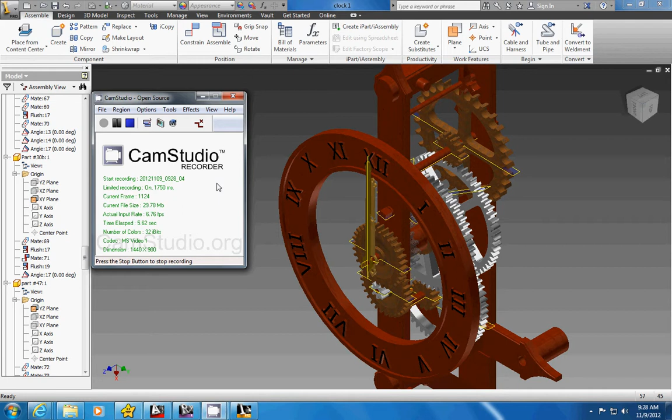For the second part of this clock animation, I'm going to show you how to make the gears work together. So you can see that I've left on all of my different gears planes that I was dealing with. And you can go ahead and see, like I explained before, that this gear and this sleeve all work together.

I'm going to go ahead and rotate a little bit so I can go through these things that work together once again. This gear and this gear all work together. I take that back. This gear and this sleeve. This gear and this sleeve.

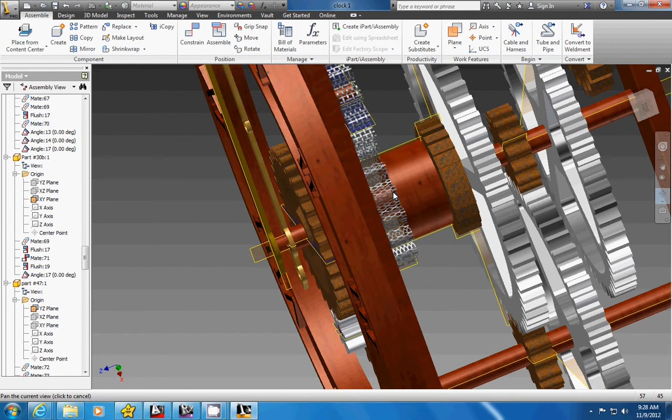Then this gear, this ratcheting wheel, this drum, this gear, as well as, if we rotate a little bit, you can see there's a little gear right here in the back, all work together on this shaft that also runs the minute hand. Then you've got a little short sleeve here that rotates this gear and this hour hand as

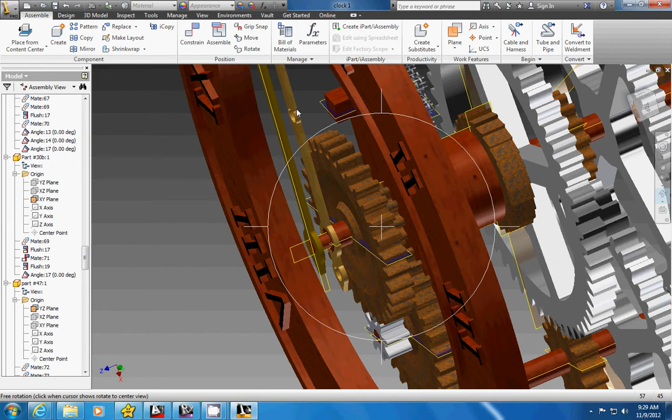well as the sleeve. Then down here you've got a shaft that rotates with these two gears, and you've got your winding shaft that rotates with this gear. This contraption on the front is how we get the minute hand to go around one full revolution while the hour hand advances 1/12 of a revolution.

Now what I'm going to show you is how to make motion between the gears that make it up. There may have to be some parts turned off visibility to be able to see this. You may also have to modify some parts to get everything to work well. So I'm going to go ahead and just start turning off some visibility here.

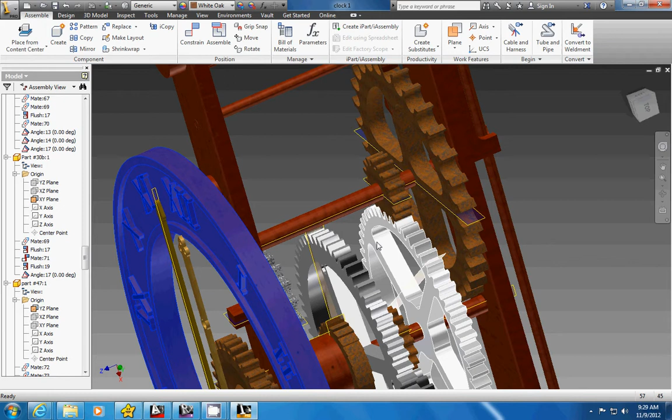They must have taken that out of here. Let's see. I'm trying to get this gear and this gear to mesh well before I actually go ahead and start constraining them. I'm going to minimize some things back down over here so I can see my list. I left those all open, so if I want to, I could turn planes back off. Before I'm done, I will want to turn planes back off.

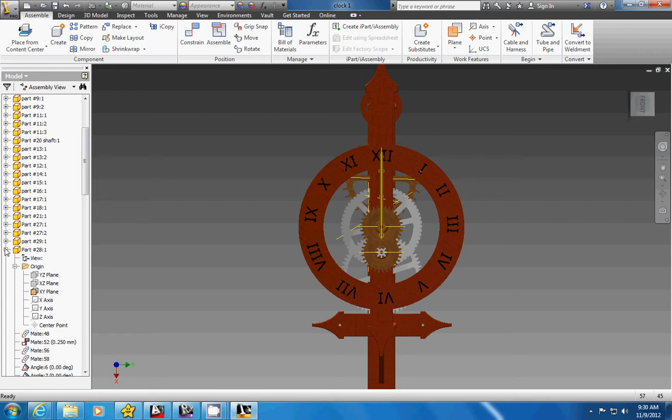Let's come up here, get all these collapsed. So now I want to shut this off. I'm just going to come over here, right click on check visibility, and I can easily turn all those back on later. I'm going to shut this one off.

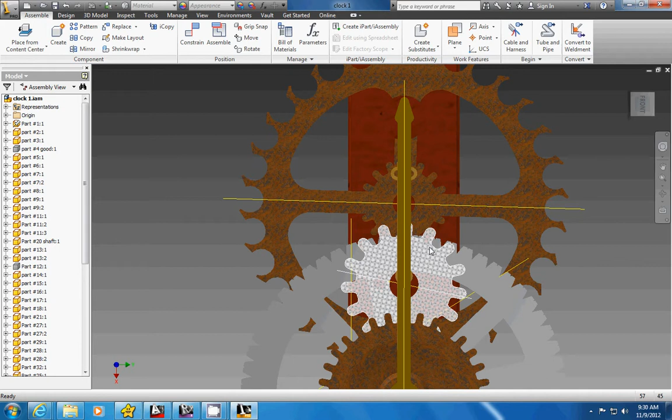So now I can see that gear, that's what I'm looking for, but I also have two gears that pretty much overlap each other. So I'm going to go ahead and come in here. Right there's visibility, I can turn it off here as well. Let's go this route. Let's come over here and see if that same error pops up for us. Okay, we'll do that, and I'm going to turn this one off so it's out of my way as well.

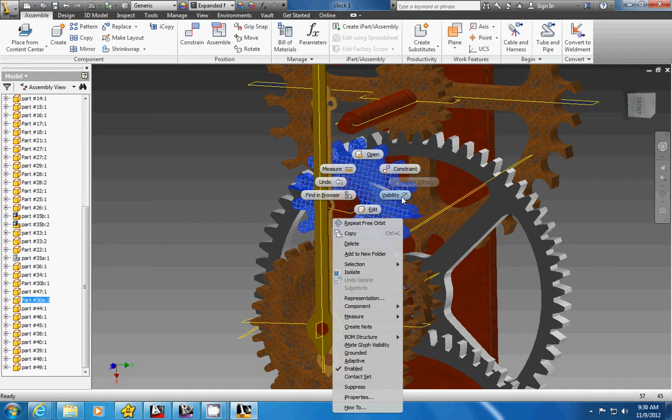Now I'm going to square up to the front so that I can look at how those teeth actually mesh together. These teeth, you can see, might take a little bit of modification, but now you can see that I've got those two pretty well aligned. What we're going to do to make them turn with each other is use a constraint. We're going to use a motion constraint, and if you think about gears, they're going to turn in reverse here.

Once I click that, I can click these two gears in either order. Doesn't matter. I just have to keep track what order I click them in. So if I click that one first, then that one, I have to look at my sheet and go, okay, how many teeth are on the first gear? That is part 26 in clock 1, and that is 16 teeth.

So in my ratio, I type 16 divided by, then I have to find out how many teeth are in the second part I clicked. That would be part 35. Part 35 has 60 teeth, so I type in 60, I hit apply and cancel out of there. Now, as I turn this, they should mesh together and look like the teeth are working.

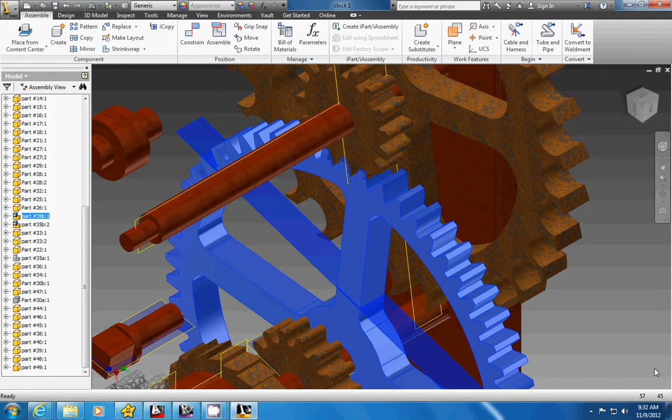Looks a lot better as I rotate out of there. So you can see that those teeth are going together. Now, part of the problem is that the teeth aren't quite the right size or shape meshing together, so that makes it look a little goofy. You can see how it works as I start to do those constraints the whole way down.

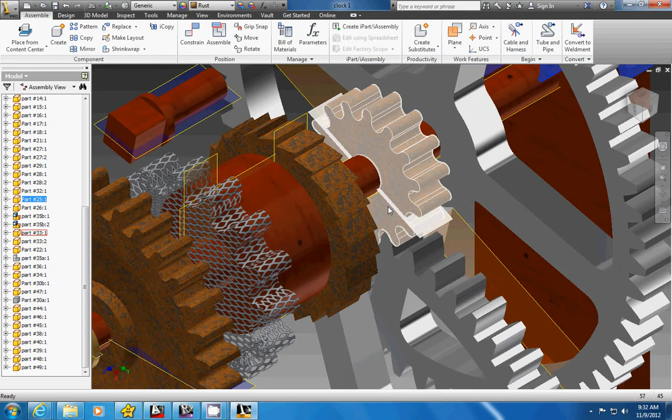Let's go ahead and do another one here. I believe this is another 15 tooth gear. Part 33 is 15 teeth to another 60. So I've kind of got those lined up there. I could constrain, motion, reverse, that face to that face. I'm going to do 15 over 60 and apply.

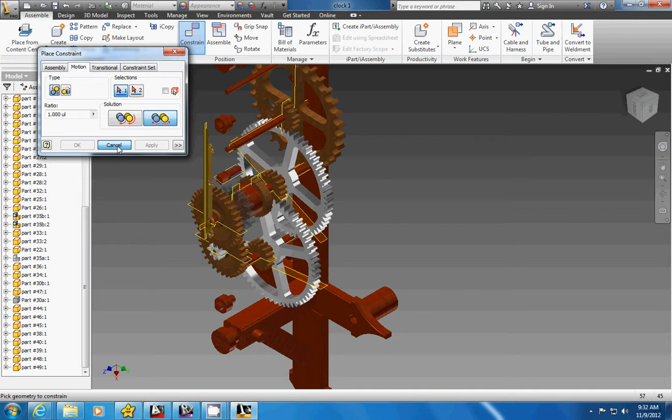So this is going to start having a trickle down effect. As I turn this one, it will turn that one, which turns the one below it. So it starts trickling down, and that's the way the clock works. You're going to have to do those constraints all the way throughout. So like I did, this one will relate to this one. This gear will relate to this gear.

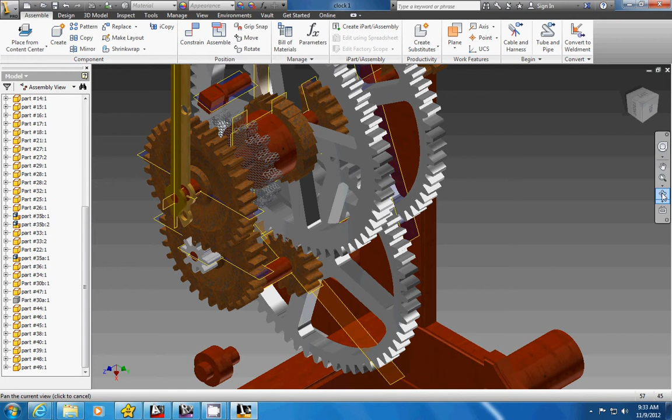This gear will relate to the one that I have shut off. Let's see if I can get that one turned back on here. To this one right here, so those two are related. And of course that will move on the shaft, which will then move this one, and this one, and the little one in the front here behind the big gear. So you will not have to do any constraints for those.

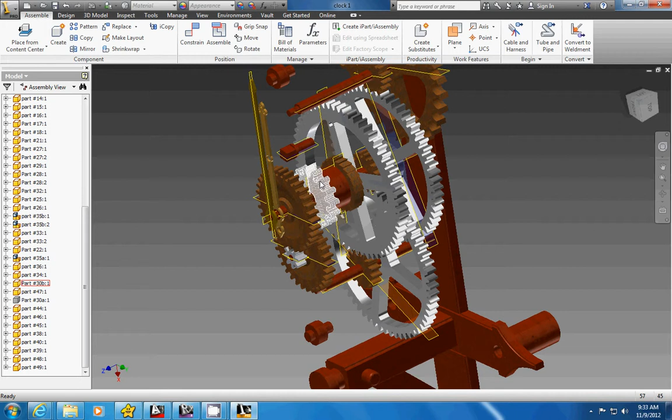While we've got this open back here though, you will have to do a motion constraint between this gear and this gear. Then you'll have to do a motion constraint between that little gear in the front on the short shaft and the gear right above it. And that should take care of most, if not all, of your motion constraints. I guess you're also going to have to do one between this and the gear that sits on this. That will take care of your motion constraints. Once you have those all on, as this rotates, your clock will actually advance.